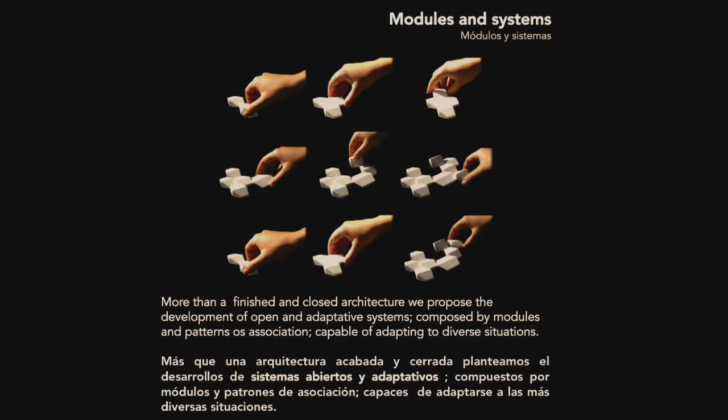The idea of the piece, of the model, of how we come to work in this way. We are interested, and I'm going to show many projects in this sense, around the idea of the unfinished - the possibility of growth, how we can think architecture around the idea of the piece or the model.

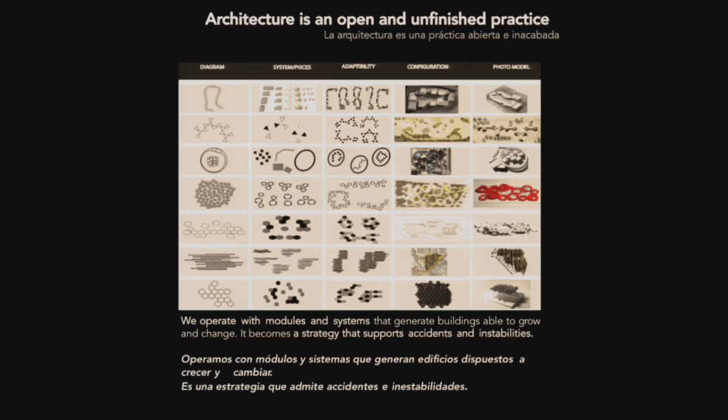This is a good example of that. This is the difference diagram where we work with the idea of different pieces and the possibility of different organization or ideas. In the end, we want to understand how we can think architecture around the idea of protocols or rules, and I can give the rules to other people, and the people can work with this rule.

I'm going to show 3 projects that we don't finish. It's finished for the mayor or for the city, but I give the protocols, I give the models, and you can change everything in this sense. In the end, it's the death of the author, because I give you the tools to do architecture. Another architect can finish it and do the architecture, and I have a lot of interest in this approach.

We are interested in working with the idea of the diagram, and I'm not going to explain why, but for me the interest of the diagram is the possibility to produce, or the behavior of the diagram in general, to think differently than how architecture normally operates. We have a relation with this idea and we classify the project into 6 different diagram rankings. We don't have an objective to classify the project in the rankings - it's a form to show, to teach my project in this way. My interest is not what is the diagram of this project, no - I want to put the diagrams to show my project of the last year.

I have interest in landscape and topographies and geographies, contours and thematics, ground patterns, models and adaptive systems, connectivities and adaptive systems, ambient and environment. These are the 6 differences we worked with in the last year. Now I'm going to show the different projects, what we do, and I'll show the categories we classify my projects into in general.

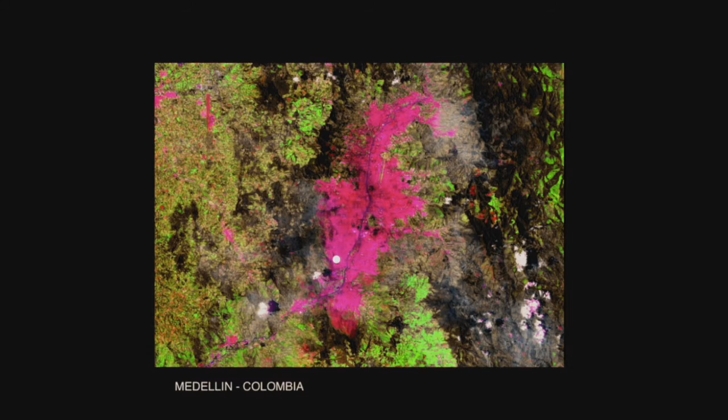I'm going to show the Library España in Medellín. Every project I'm going to show is a competition. This one was a competition made 7 years ago, in Medellín. Medellín is a long valley between two big mountains, but Medellín in general is mountains - the people from Medellín say of themselves, 'we are the capital of the mountains,' and Medellín is mountains and geography.

We wanted to work with this idea when we did this competition. We worked with the idea of contours, the idea of the valley, the idea of the mountain, and we wanted to understand how topography operates in general, in this case. These are the different forms we worked with, the idea of the volume of this building going up the mountain, as part of it.

It's part of the mountain in general. It's not the mountain, it's part of the mountain. That's a very different approach for me in general.

This is the model of this, the first idea when we did the competition, and this is the project, very, very hard.

Neighborhood in Medellín. This neighborhood was made around the 70s, 60s, for people moving from the orient of Medellín, and this is a non-planned neighborhood. When we did this project, it was part of the more important political project of the mayor Sergio Fajardo.

In general, this project has the power to give visibility to this political position of the mayor of the city, and in the end, this is the real value of the project.

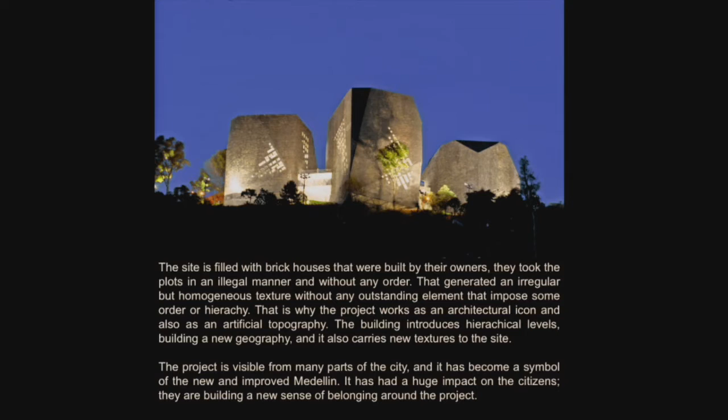This is the idea of this building. We want to work with the idea of how we can put a signal of this political visibility in Medellín, and we want to extend this idea to the landscape, to the rocks. It's not the metaphor — I repeat that because it's more about the relation with this idea in general.

In general, the people in this neighborhood around the 70s and 80s didn't say 'I live there,' because it was the most dangerous place in Medellín in the 80s — the quarter of headquarters of Pablo Escobar — and people didn't like to say 'I live there.'

Now the people say 'I live over there.' In this building is the visibility of this political change, of the change of the society in this case.

For me, the most important result of the project in the end is that it changed the economy of the neighborhood. The economy changed because this building became a symbol of the city, and people go there. It's a public point for tourists in general.

I was going to show different videos, but I'll cut it short because we don't have a long time to show these videos. But we are making a book with different interviews of the people living in the neighborhood that we've been working with over the last year. And this is the interview of the people who live in Medellín around the library.

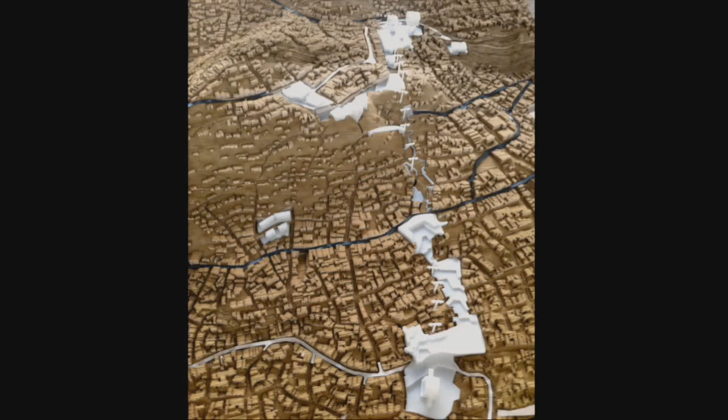This is the library, here and here. The project is engaged with different public spaces and new streets.

I am not going to explain the function of the project in detail, but we broke up the program because we want to multiply its use at different times - night and morning - because in general the people who live here work from 7 to 7 and don't have the possibility to use the library otherwise. The library lets you open different volumes, or integrate with the idea of the platform that runs through the project in general.

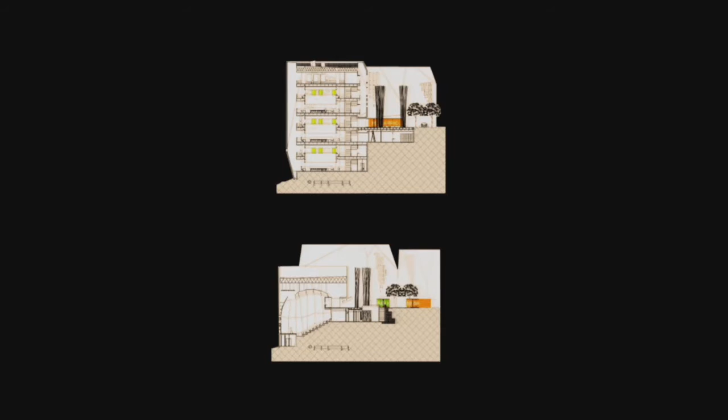This is the platform, and this is the section - you can open the library until 12 at night, or just open one door. This is the inside of the library and its relation with the outside.

We wanted to close the idea in this place: the library goes up the mountain, related to the idea of the contours, like a cut into the mountain. This is the public space over the library, and this is a video of the library to show.

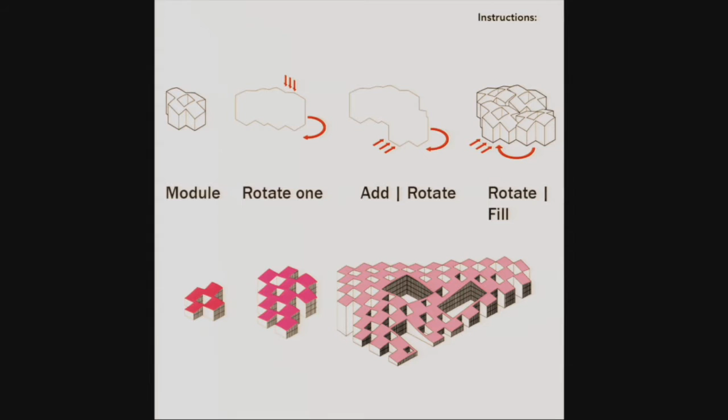We worked with this module and the possibility to connect it, designing the idea of the topography in general. This is the model of the project to continue the topography of the place, and this is the model showing capacity to grow, to adapt to the ground over time in general.

In this case we wanted to trigger and work with the idea of intercambiabilidad - how do you say that - exchangeability, and the possibility to interchange the place of the library.

This is part of another exhibition we are doing now in Spain, with the idea of playing the game of my project. This is a good way to show this possibility of interchangeability - the possibility to have the office, the laboratory, you can move, you can work wherever you want when you arrive at this place. That's the idea of this project - we want to trigger the possibility to change the ways to work, the ways to research, different forms of work in this case.

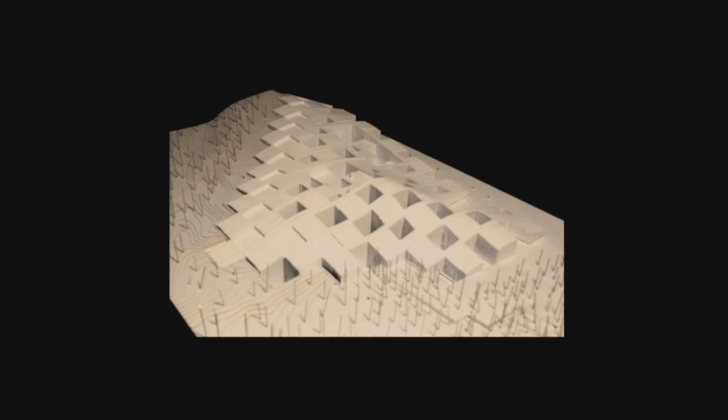You can change the use of the building. You can arrive in this space, or you can work here, but you can change it every time. The possibility is not the result of one function. The possibility is to the void in this case, so you can use the void in general in this place.

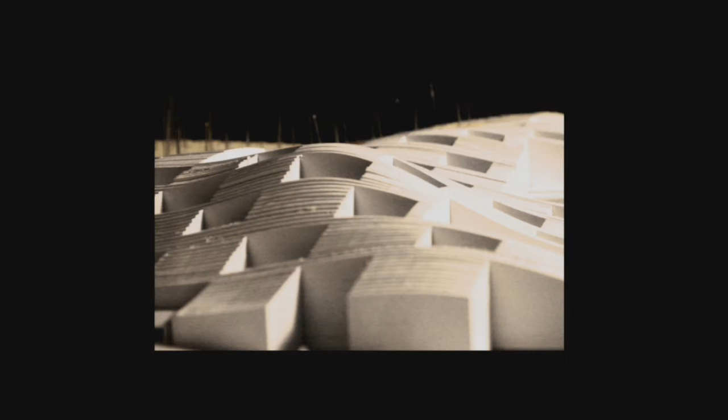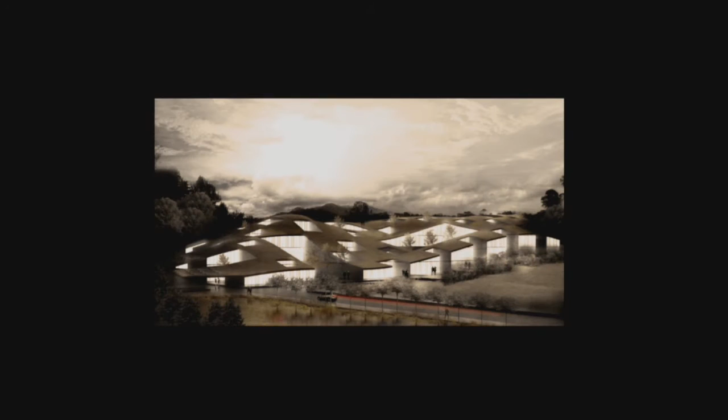This is the idea of the project, to continue the idea of the landscape, to continue the mountains. This is the program. You can use different spaces where you want. This is the roof, the idea to go upside to have another possibility in general. This is the general view of the project, and it's the inside of the project.

This is another classification of the diagrams. I am interested in this case in the ground and patterns, how we can think of the possibility for this ground to grow, for patterns to grow in two different senses, or how you can think this in finishes architecturally with this case.

This is another competition, a scenario for Coliseum for Medellín. This is another city, another situation in Medellín, in the valleys, in the traditional, consolidated city, and we have to understand how to operate the plantation in general. In the end, the plantation is a strategy to occupy the floor. We want to understand how to operate this idea of the plantation, to have the possibilities in finishes, its capacity to adapt and grow, and this idea we have worked with in the project in the Coliseum.

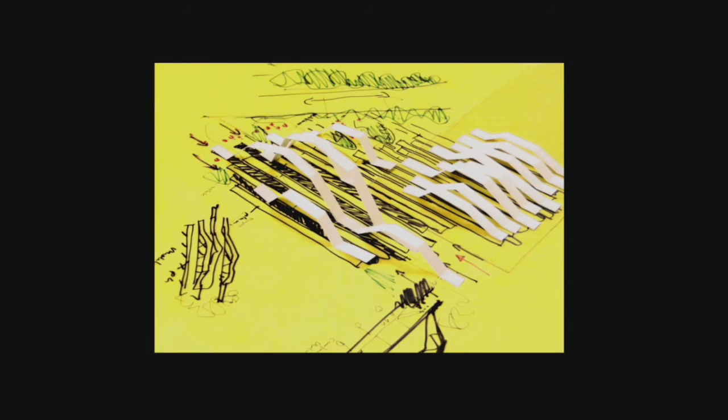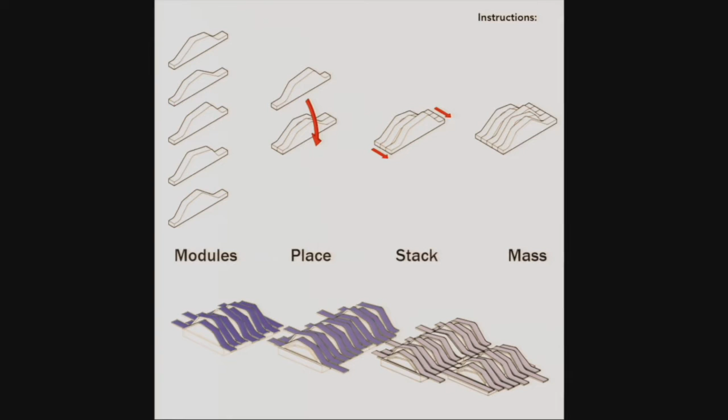This is the first sketch, and the possibility for the patterns to go up to be the different sports inside of this building. These are the modules of the place in general, we worked it into the idea of the project. This is the diagram and the possibility to grow, to adapt. You can understand that you can do 2 coliseums or 3 coliseums, 4 coliseums, but I give you the protocols, I give you the modules, and you can do what you want in the end with the project in general. This is the model of the project, and I'll show better how the form of this project is in general.

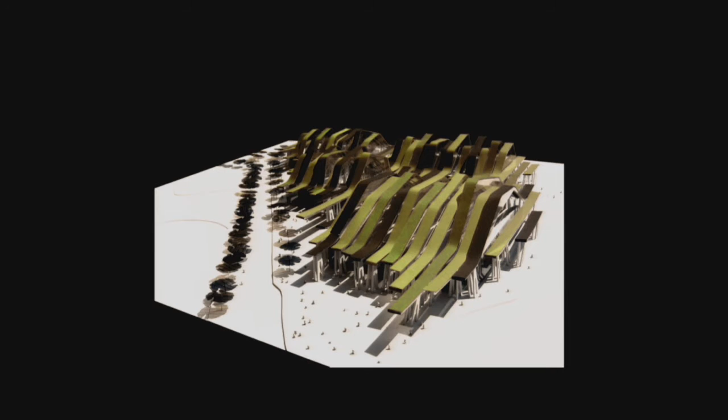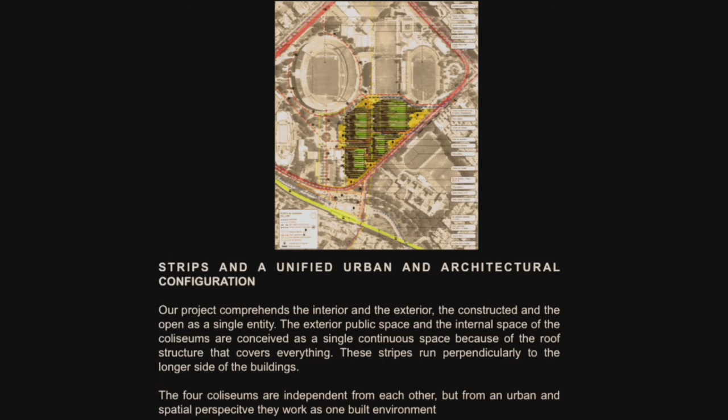This project is in the Unidad Deportiva, an Olympic place for Medellín, and the competition said they wanted 4 different buildings in this place. We wanted to work with a more strategic idea, and you can have different buildings, but for us the most important thing is the idea of the geography, of the connection with different patterns to connect in general with the building. This is the place of the building, between Nutibara Hill and Flying Hill, with some relation to the idea of the mountain, of the color of the mountain. It's not the most important idea of the project.

This is the project view, the idea in this case. I like this picture because we did 4 Coliseums, this one and this one.

The other Coliseums are made for the people of the city, and if you see that, in the end it's how the people apply the protocols and the rules. In the end, for me, this is very interesting, and I like that for my project - how I give you the model, how I give it to you and you can do what you want with the projects. They can grow, they can adapt.

The form in general of this building is not design, it's more strategic. This building stops here because we have little stores in the front, but you can move the little store, you can move the pattern. It's not the composition, it's not the idea of design. My project is not made for design, it's made for strategy - the idea of strategy, or how to operate, the behavior of this system to work.

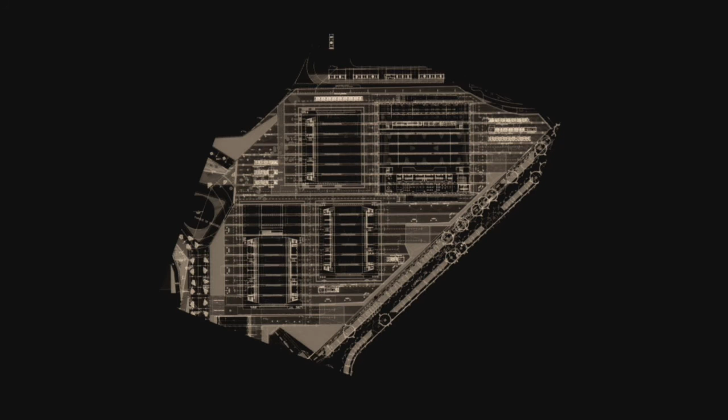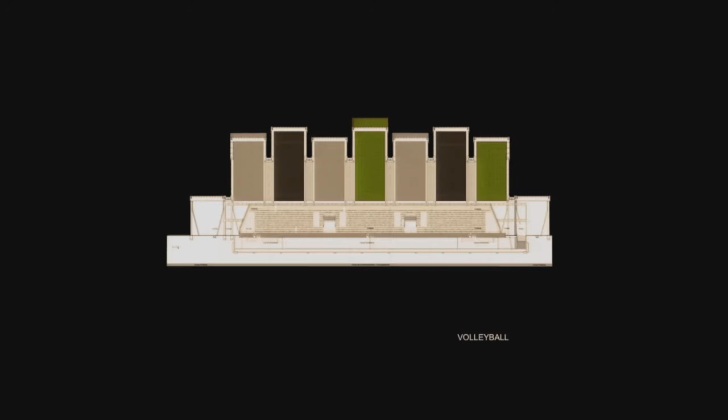This is the plan of the building. This building is made with 7 different roofs, and we put them in different positions - A, B, or C - and this positioning makes the diversity of the project.

This is the diagram of the different roof patterns, the possibility to put in different cases, the difference from the pattern in general. This is the idea, we don't design this—I can move this roof 2 meters or 3 meters, that is not important. What's important is what triggers this roof: the idea of the shadow, what happens down below this roof. This is what triggers the possibility to make more public space.

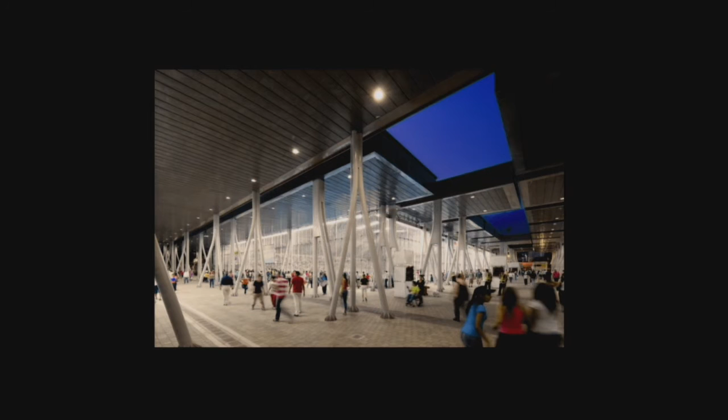In general, sport facilities are the result of the field inside. We want to break this idea at the border of the facility, inside of the field. I want to break this and trigger other forms to use the upper side of the buildings. This idea is not the result of the field. Maybe the border is very rectangular for the field, but the roof goes out, in, out—that's the idea.

In this case, this is the Fourth Coliseum, the relation with the mountains of the city from inside the building. This is another interest we have when we design public buildings: how you can look inside of the building.

In general, sport facilities are closed—people don't know what happens inside the building. How can we open this idea, how can you see inside the building, and have people relate to what happens inside? People look through little holes to see what happens inside, and the relation of people inside the building with the upper side is another thing we work with, along with the bioclimatic aspect.

The weather in Medellín is wonderful in general. The idea is how light comes into the buildings, the relation with the border of the city, and another view in general of the building.

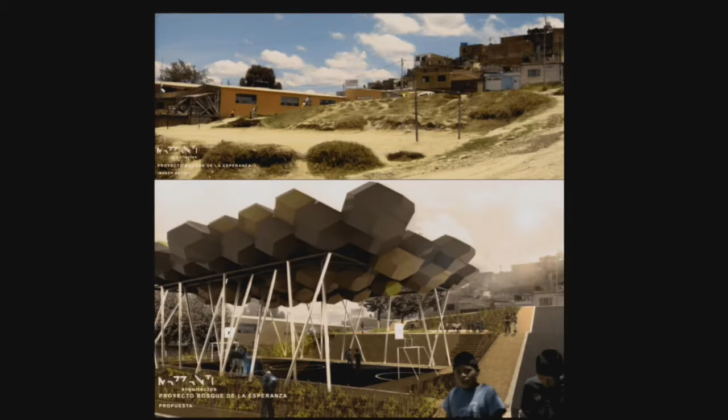We wanted to work with this idea—it's difficult to translate, nobody knows how to translate 'la frondosidad.' How do you say that? Foliage—okay, the idea of the foliage in this case, making a green point for this little soccer field. There's a little school nearby, together with the field, and we wanted to work with this idea of the model and the piece, and the possibility of adaptability of this little piece and how this building can grow over time, in the next year.

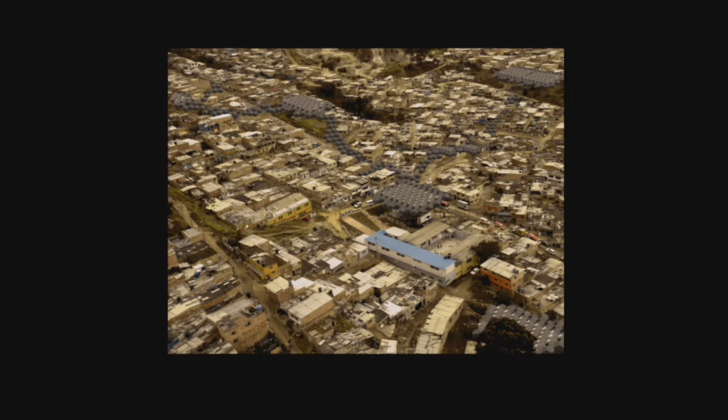This project was built, but it's very different from the Santo Domingo Savio library in Medellín, because that library came from an urban project. We wanted to work with this little project as an urban project too, growing over time and connecting to another important place, another void space in this neighborhood.

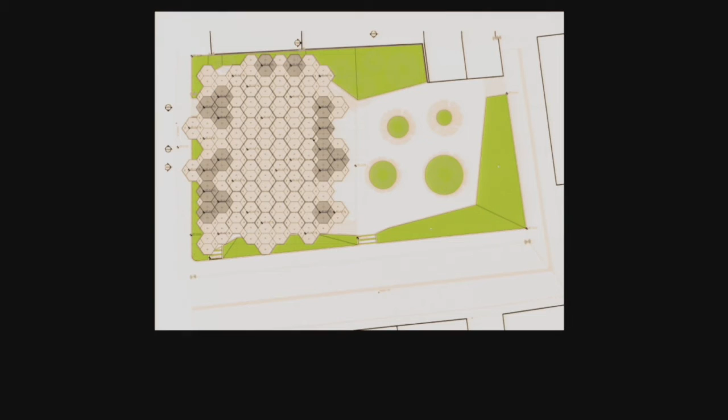Now we are starting to work with the mayor of Soacha to make this connection in Cazucá. This is the image of the canopy idea, the plan of the canopy, the different models that can grow in different spaces, and the connection with the little school—this is the idea of the canopy.

We want to trigger another possibility with this project. In general, in this neighborhood, people go into their houses by 7 at night because it's very dangerous to be outside. With this project, we can get people to stay out until 11 at night—it's a place for safety, I'd say. It's a place where people have very different behavior, a different use. It's not only for playing soccer—in this place they teach, they learn, they have little music concerts for the neighborhood in general. This is the interview in this case.

Muchos niños que ya salen a vacaciones, en lugar de que se vayan a callejear, entonces un campeonato, unas vacaciones creativas ahorita quedarían buenas ahí también.

Antes era un potrero, ahora es una cancha multipropósito donde los niños pueden venir a practicar fútbol, baloncesto, voleibol. Nosotros le decimos el polideportivo de Cazucá.

Inicialmente tenemos 3 escuelas de formación deportiva o clubes juveniles con el Instituto Colombiano de Bienestar Familiar, operados por Colsubsidio, y tenemos también 3 escuelas de formación artística con la Secretaría de Educación y Cultura del municipio.

Esta construcción del polideportivo ha sido definitivamente valiosísima para esta comunidad, una comunidad afectada por la violencia, una comunidad afectada por todos los problemas sociales que se viven en la comuna 4 de Soacha. Problema de desarraigo: entonces nadie es dueño de nada, nadie cuida nada.

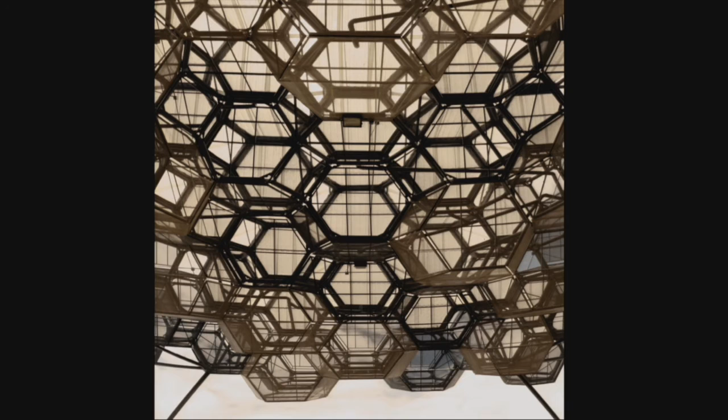This is the image of the project around the neighborhood, the little school of Shakira, the relation, the idea of the shadow. I find this picture very interesting, because sometimes you see the project as solid, and sometimes you see it very, very transparent. You can have a different view depending on your point of view of the project in general.

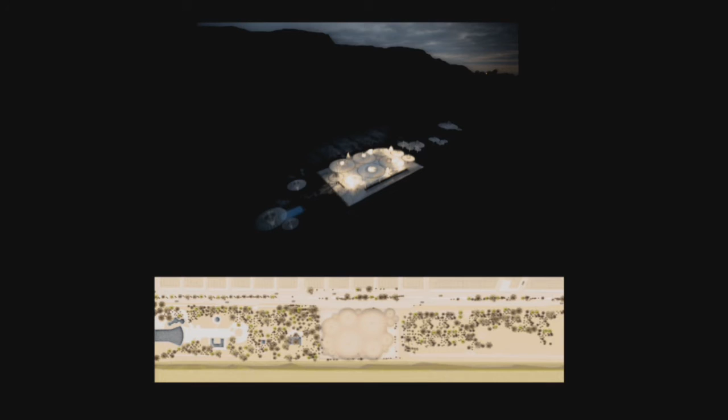The place where we did the Velodrome is a long space, a park, together with the airport of Medellin in the middle of the city. We want to work with the idea of the piece, but it's another piece, with the possibility to attach this piece and the possibility to grow it in this case.

This is the model, the simple model, the possibility to attach this building in general, and this is the idea in the end: to use the idea of the wheel of the bicycle and the structure of the wheel of the bicycle to do this project.

This is the models, the catalog of the models, and how they operate to attach and grow in different moments, and other possibilities in general of this idea of the model and the piece to point.

The project, I'm going to explain very fast: the private program is down below. This is the place for the sport people. But for us, the most important thing is the idea of the public space in this case.

The idea of the little hill and little topography, where people can go up and have a relation with this hole in the middle of the Velodrome.

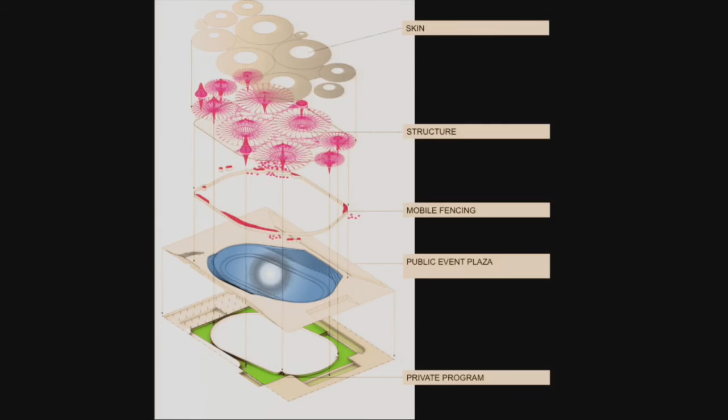If you see the structure, it is put over this one—I have the same approach with the Velodrome. How we can break the relation of the field where the sport is played with the border of the Velodrome, and produce more public space and other activities in general in this case.

This is the Velodrome, and this is the public space around. The facade of this project goes down, it moves.

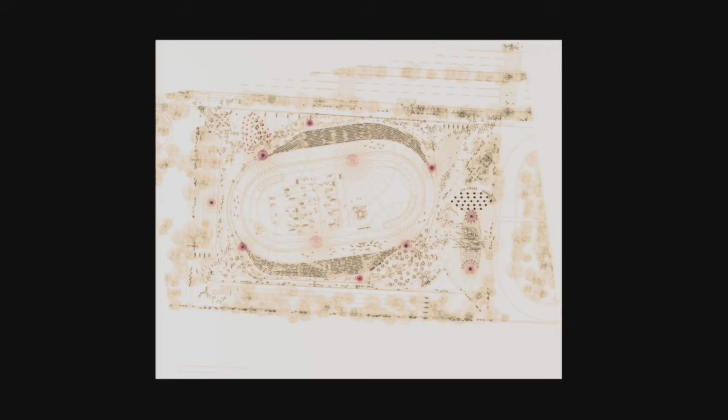This is the idea of the building, the different model, where it is attached, and this is the idea to dissolve the border of the field, or the form of the field. This is the model to operate for the model.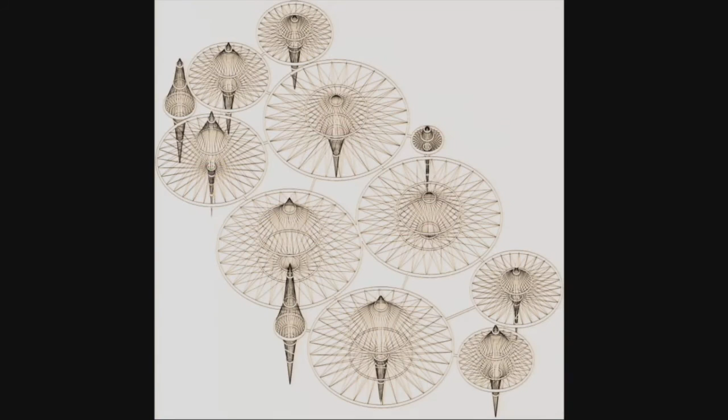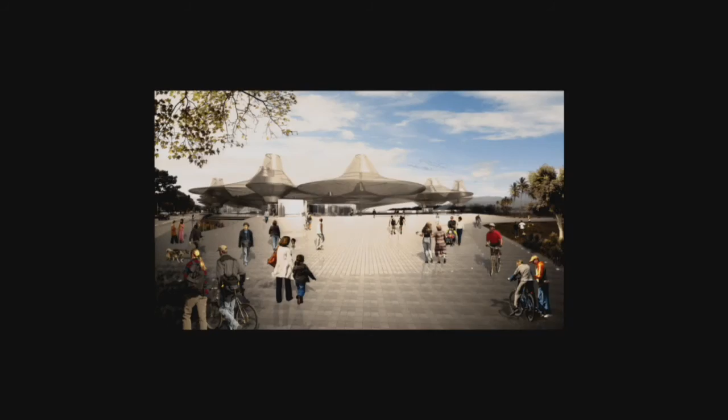The different piece attachment - we have 8 different models to connect to make the building in general. Another view, the idea of the topography, how you can walk around this place, and how the facade moves, and how people use this one in this case.

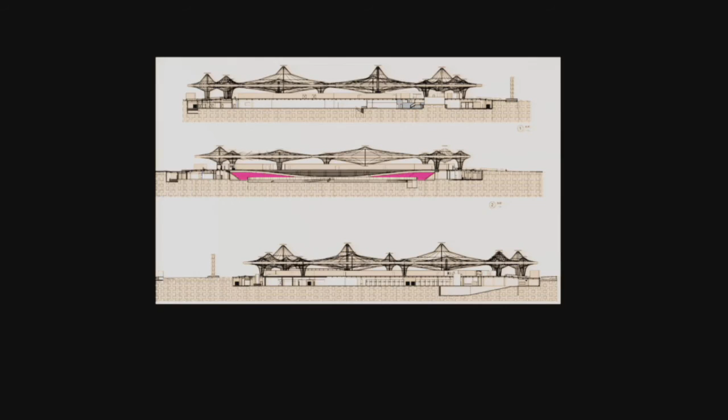This is the section of the project. We have three columns for attachment. These volumes are in the air, floating in 3 different ways.

What we want to trigger there is to work with the culture of the bicycle. It's not only for the sport, it's for the cyclist shop, for exercise, and we trigger other activities around the idea of the role of the bicycle. People can come to this place and have another relation, another form to work around this Velodrome. This is the idea to move around the Velodrome.

If you see, it's more near to the idea of the canopy, and we dissolve the idea of the Velodrome, of the public building, into the object put in this place. These are the different possibilities down at the canopy, of the roof, in general. This is the view of the project.

This project is starting to build in 2 weeks, I think. So it's finished the bidding process - I don't know, the competition to build.

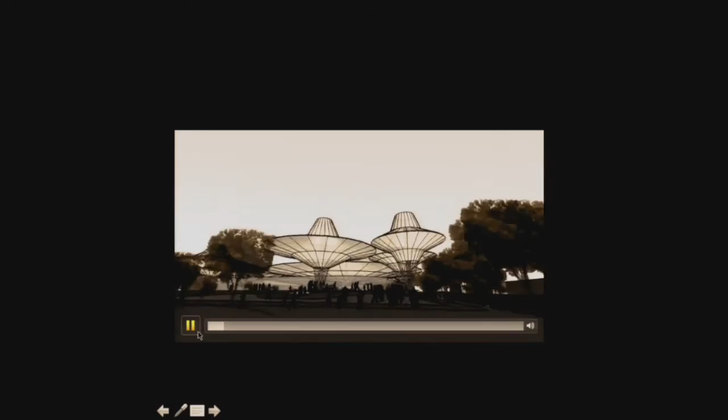This is a very simple video. It's not a beautiful video, but you can understand what happened with the space, with the idea of the public space, the canopy, and the facade when it moves and opens every space for everybody in the neighborhood, for the people in the city.

This is the border - the border goes down and opens this public space in this case. The different columns, and this is when it's not the facade, and you have another relation inside the project.

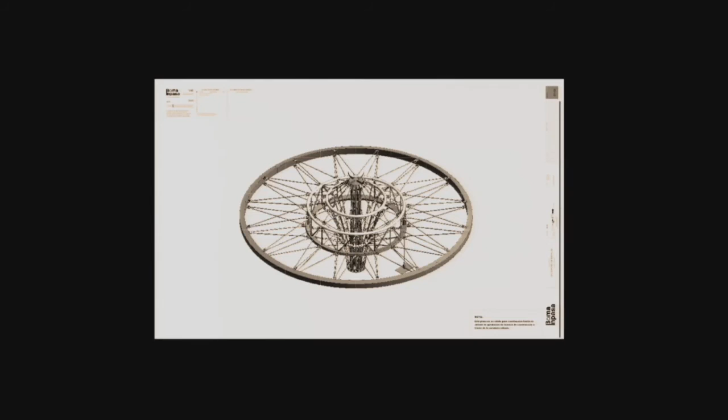These are the different drawings of the structure made by the engineers. This is the model of one piece, a very small piece of the different roof, and this is the finish. This is the structural drawings of the engineer. These are other models of the work.

I'm going to speak about another program - it's a modular system for kindergartens in Santa Marta. It's 3 little kindergartens that we did with one simple system and one project. We did three kindergartens in 3 different places with the same system.

We want to work with the idea of the flower, to connect it to the idea of the flower, to disseminate the flower in general. This is the different model, the sketch of the project.

When we work with education in public buildings, we want to work with the idea of the pedagogic - how the space has the capacity to trigger different forms to learn. You need to understand what happened with the pedagogical system. The form of the building is the result of the pedagogical system, of what you want to trigger, what you want to learn in this case.

In this kindergarten, we worked with the Reggio Emilia system, with Malaguzzi, and this is the sketch of how they work it, and how this sketch shows how they teach the children.

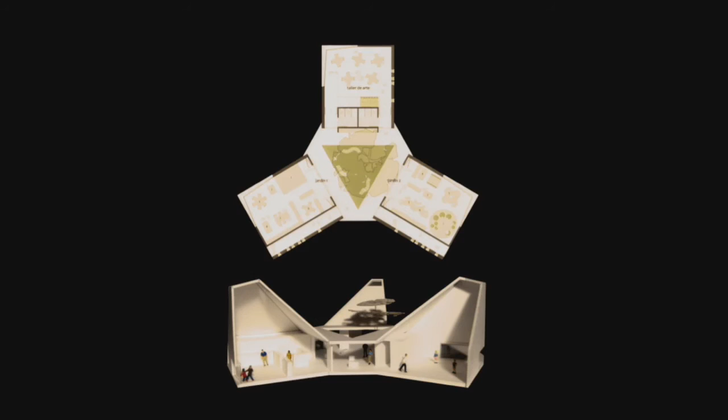These are the models, this is one model - the possibility to go out. The result of the form is for the bioclimatic.

This is the catalog of the different pieces - the possibility to do different schools, different pieces, and we did 3 kindergartens in this place. This is in the north of Colombia, in Santa Marta, and we did Timayui, La Paz, and Bureche, with different configurations using the same models.

In the end, it's a critique of the traditional idea of the place, because the models operate and the position is for us the most important thing in this case. I'm not going to explain that, but in the end, it's the critique of the traditional way of understanding the project going off the site.

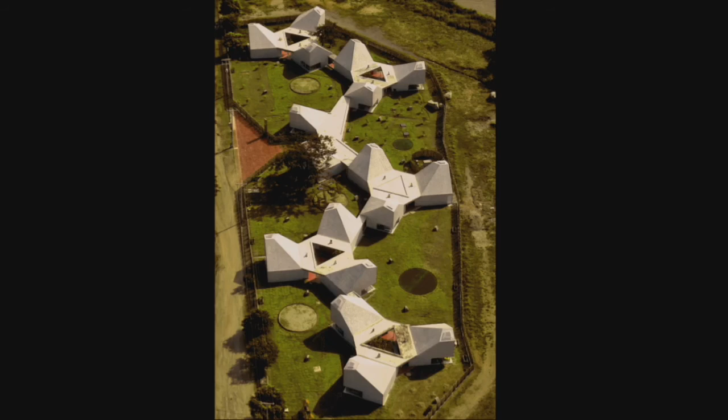This produces another relation on the site. These are the different models, and they're going now to do another 2 models, because the project for the place for them finished here, and now they're going to start another piece.

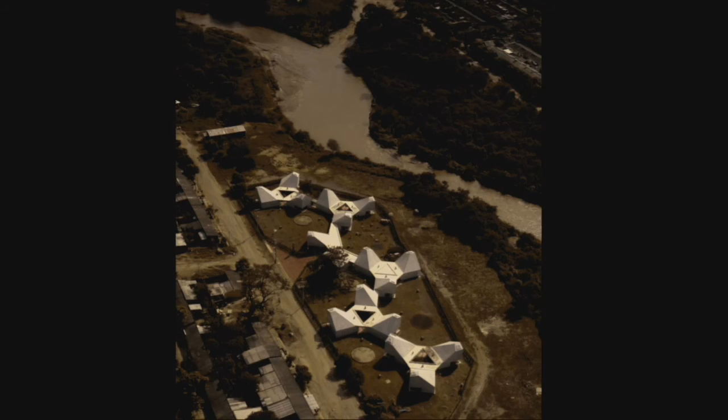That is interesting when you work in countries similar to Colombia, because you can do one project with 3 models since you don't have more money, and you can grow as you get money for that.

This is another configuration built in another place in Santa Marta. The relation with the idea of the mountain - we repeat this idea, the relation with the place, with the idea of the mountain, of the rocks.

The color has a relation with the mountain near the place. This is the neighborhood, which doesn't have an urban project, only this project. But now the project is very interesting, because it's a place to teach other forms of work for the women in this place.

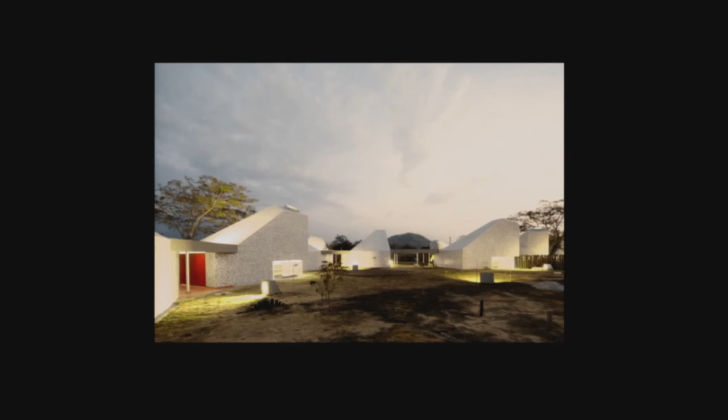It's not only for the children, they have other capacities, and they work with different forms to teach. This is the form inside the building. The weather is very hot, and the hot air goes up to the top. Another view shows the relation with the idea of the mountains, the volumes with the city, and how people use this place in other forms.

I'm going to finish with another classification. It's an ambient environment. We have an interest in how we can work with the idea of the ambient and the weather in the architecture. It's not only material form to work with.

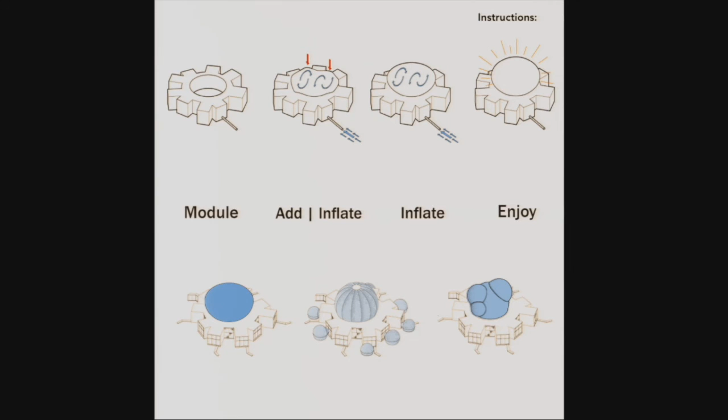This is the model of the project, but we put this inflatable in the middle of the court, in this case. What we want to trigger - we want to teach the children, and we hope the children can understand what is the difference in other places of the world.

We want to teach what is the sea, what is the jungle, the planetary, the North Pole. We can put different dress in this building, and the children can learn what happens in general. This is the model, and this is the possibility to change.

The other little inflatables around the classroom are for exercise, but the principal inflatable has the capacity to repeat the ambient of other different places. It's very easy to work with this idea of the inflatables - we can put in 20 minutes different possibilities.

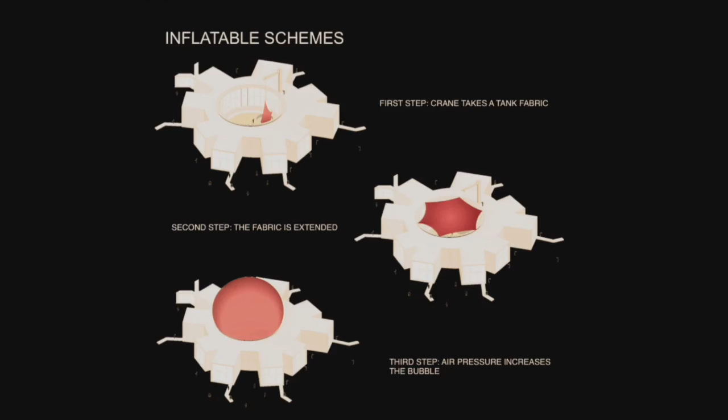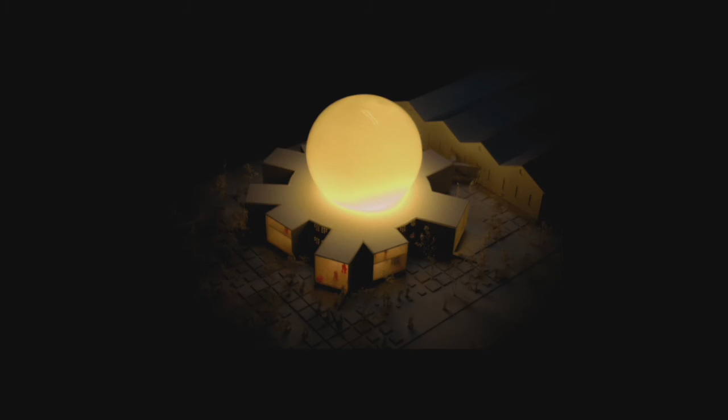I have another interest to open and close the different classrooms of the building, another possibility. These are the models we worked with - the idea of the inflatable at night, the idea of making another action inside the building. This shows the different perspectives and views of the building in this case.

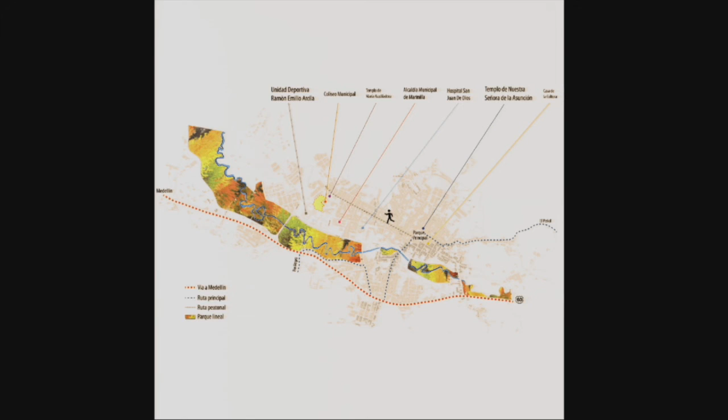It's near to the long creek or park, in this case. These are the models - the possibility to connect another piece. This is the catalog of the piece, and the possibility to grow and put different actions in this case.

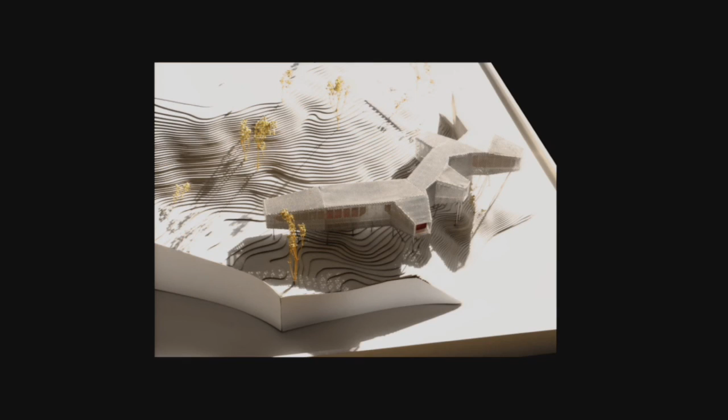This is the project, and the idea of the project in the end is how we can make a project for exchanging flowers and plants in this city. This is the idea of the project - to connect two different points of the city. This is a way in Medellín, but we want to work with this idea of the domestic, how we can put the domestic upside in the public space.

We want to trigger that people go and exchange flowers, put flowers in this place, put hammocks, put chairs, or trigger other forms to use the public space, in this case, in the project. This is the possibility to connect - the people walk on this side, go down this stair, and this capsule is the space for the teachers.

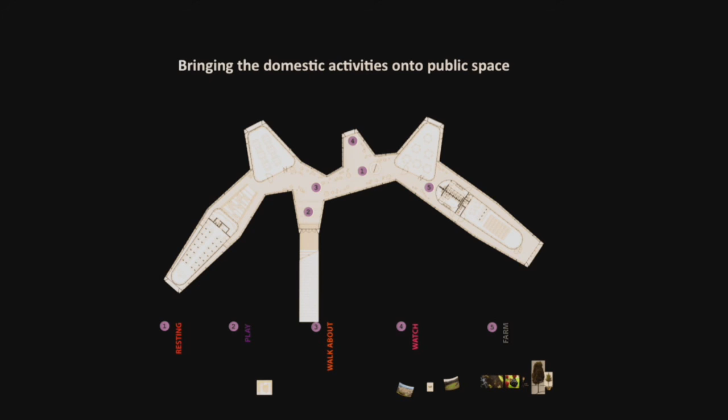This is a school for teachers in Medellín, but in the end that is not my objective. We want to trigger other forms to use this place in Medellín, because you can make many schools with good rooms for teaching. How we can trigger other possibilities of the building, multiply the use, multiply the exchange of the people, and the embracing of the people in general in this.

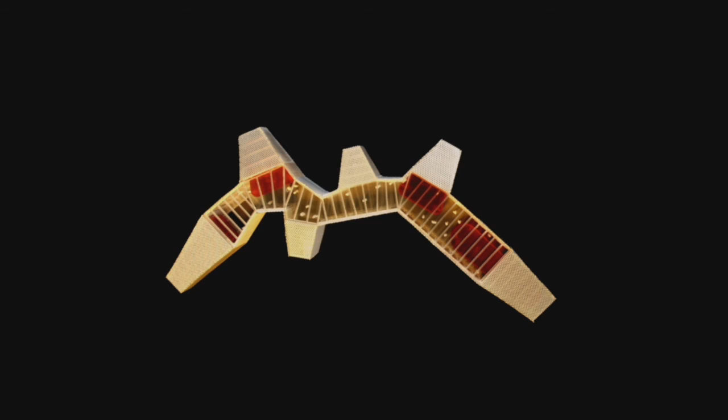This is the model. The project is made in una malla, a mesh, and the people put plants and flowers in the mesh, yes. And the people exchange that and have another relation inside of the building.

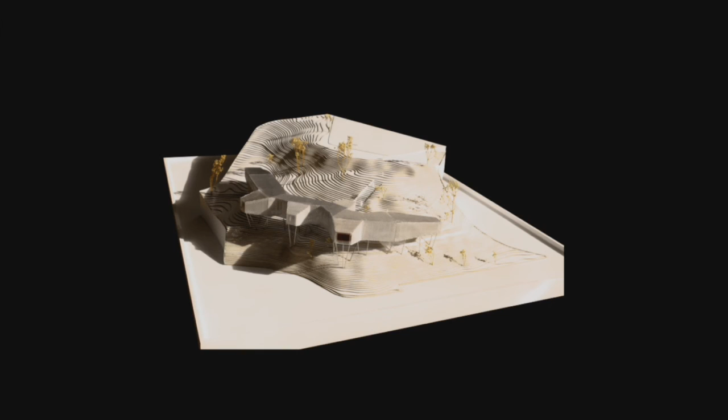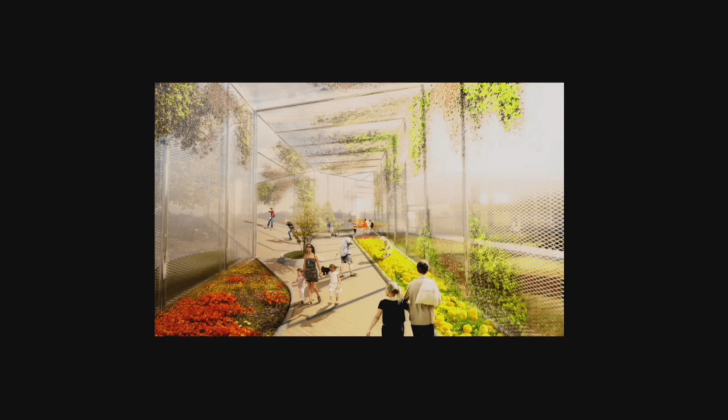This is the little street to come here. The people need to connect to the top of the hill and down the hill, and the people have to move in this place. This is the connection, what we want to trigger in general, and this is inside of this place. The idea of the border, the transparency.

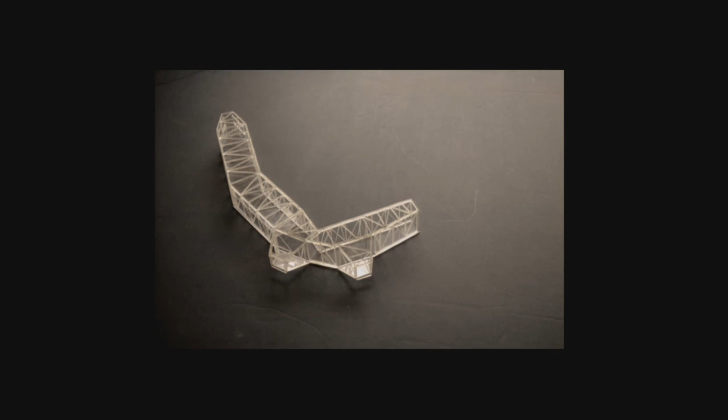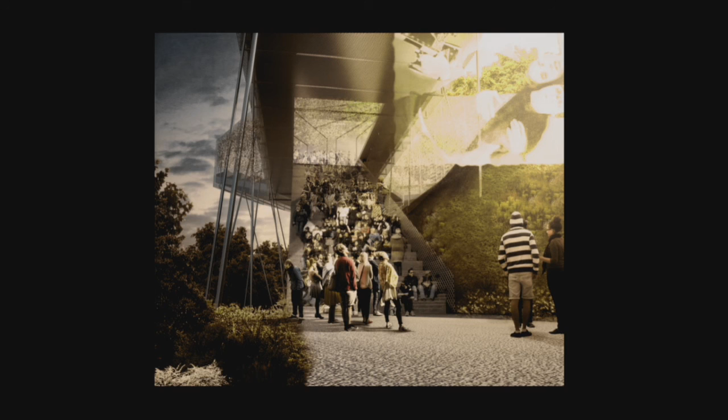This is the plan, the idea of the capsule to connect with different ways for different connections in the city in general. We started building this project 2 months ago. This is the structure of the project, and this project can grow. The idea is to grow next year, because they have to develop the idea of this school near Medellín. This is the idea of the stairs to go up, and the stairs have the possibility to use for projection, video, cinema, theater, and other forms of teaching.

This is my interest, when we have worked in the last year with the idea of the model of the piece or the finishes to grow, what we want to trigger, what is the real interest when we do architecture. The problem is not the design in itself. When we design, what we want to trigger, what we want to produce in general. Thank you.